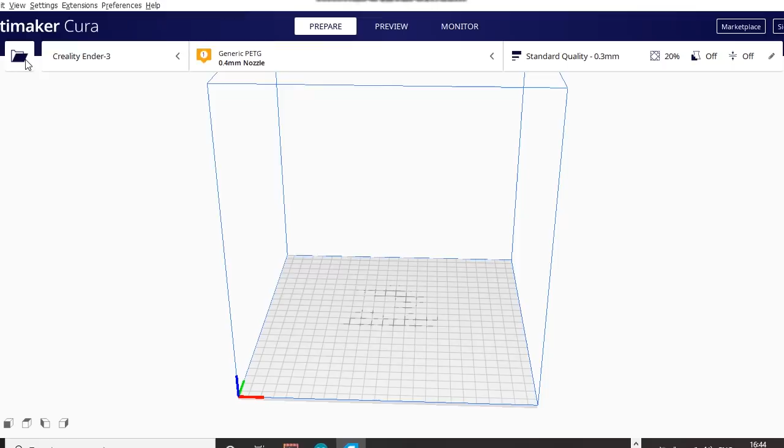So in this series of 3D printing basics, we will learn how to set up a 3D print in Ultimaker Cura. Okay, so first of all, we will have to open a file. There will be a STL file, so I'll just open this one. So you can set it up anywhere like this.

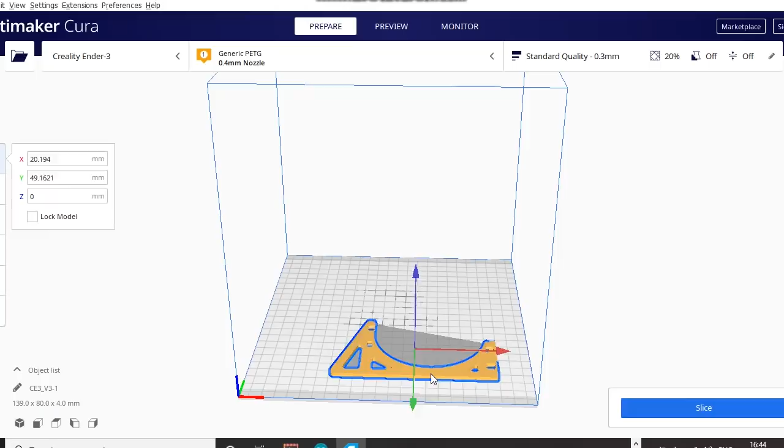This is the move tool. This is the scale tool by which you can scale your model, like I am doing it 80%. We can move it again. Just double tap on it and it will move. This is the rotate tool. You can rotate it anyways, like so. Okay, so this is the mirror. This is per model settings, and this is the support blocker.

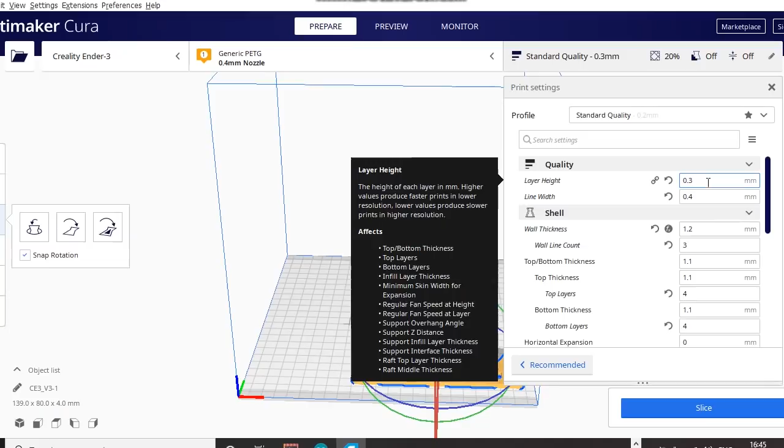So here we are in the standard quality profile. So we can keep the layer height anywhere from 0.06 to 0.32. 0.32 is the worst and 0.06 is the best quality which your printer can handle. The line width is usually the size of your nozzle. You can keep it 0.6 for faster and stronger prints.

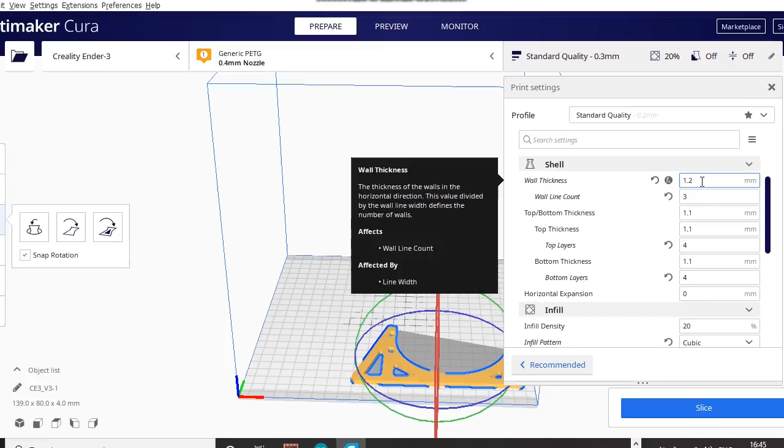Now we come to the shell portion. In the shell portion you will get wall thickness, the size of the wall, the thickness of the wall instead of the infill, and the wall line count. Like if the line width is 0.4 and the wall line count is 3, so 0.4 into 3 is 1.2 mm. So like so it is calculated. The top and bottom thickness, top layers and bottom layers.

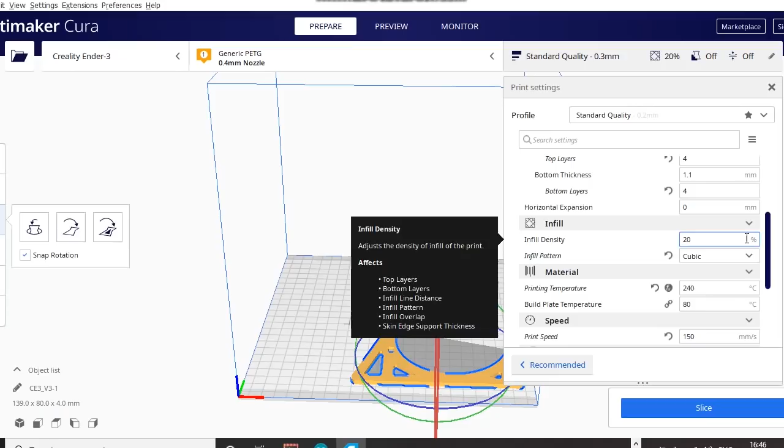Then we move on to the infill settings. So the ideal infill is 20%. It is very strong, but if you have to make a part which is stronger and needs to handle more loads, you can keep it 80 to 90%. I don't recommend keeping the infill to 100%. It will increase time and will not give you the sufficient strength as well. Here it is the infill pattern. I recommend the cubic infill pattern, but you have 20 infill patterns here.

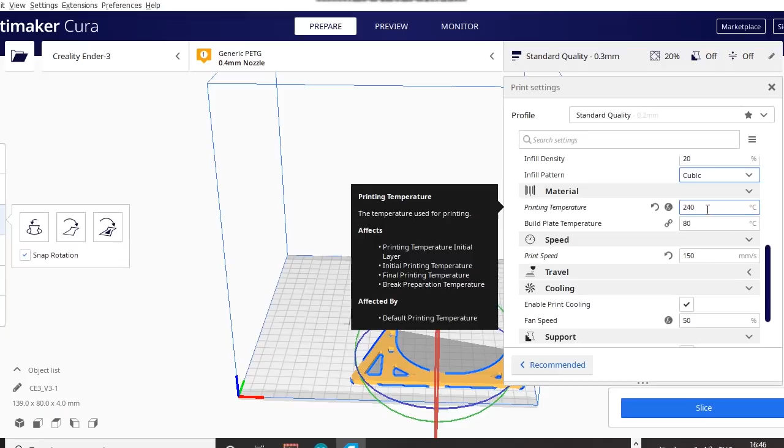This is the material settings tab. So here I have the generic PETG filament. So I am using 240 degrees Celsius for the nozzle and 80 degrees for the bed. I have a custom and very strong printer, so I print at 150 millimeter per second. I recommend printing at 50 millimeter per second.

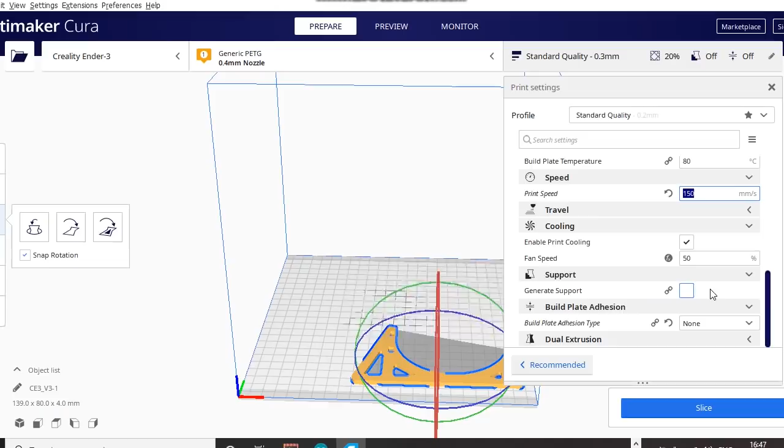Now we come to the cooling tab. This is the cooling fan speed. The support functionality. We do not need supports in the model, so I am just switching it off. And the build plate adhesion. You can choose any of these. Then we just click on slice and it will show you the time with the cost of the filament, the length of the filament which will be used, and the weight of the filament which will be used.